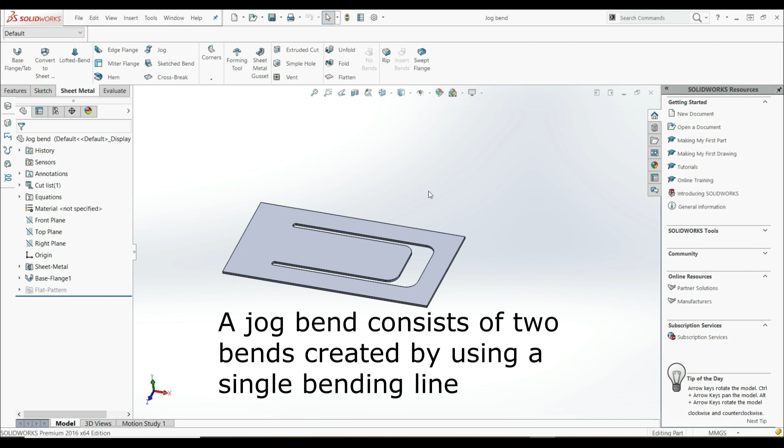In this lecture, we're going to show a new tool, and this is jog bend. A jog bend consists of two bends created by using a single bending line. The sketch of the jog bend must be a single line, and it's not mandatory to be created through the entire length of the face. So let's show how this works.

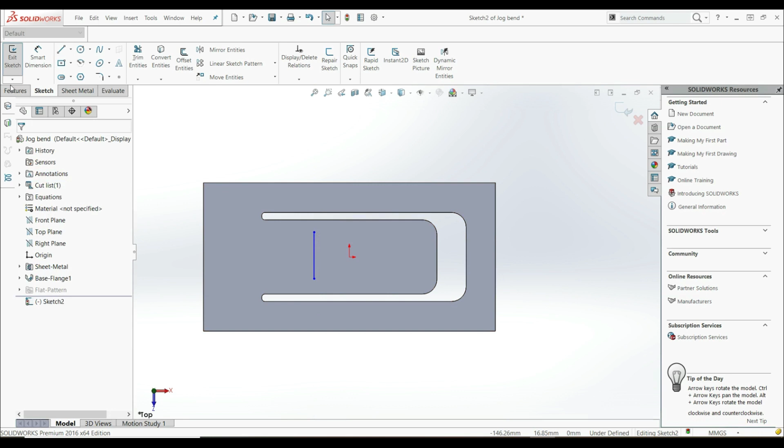So let's go to this face, let's create a new sketch. Let's select the line and let's create a line here, somewhere here. So the line doesn't have to go through the entire length of this bend. Now let's go to the sheet metal, and now we're going to select jog. Here we have to select the fixed face, so we can select the left side of this line or the right side. Let's select the left side. And now here we can see the preview.

Now here we have two bends. The first bend here and the second bend here. So the first bend is here where we have a line. And the second bend here is with some offset distance, and this offset distance is here, as you can see. So here we have a blind offset distance of 30 millimeters. We can change the direction like this, or we can go like this.

As well, here we can change the bend radius. We can uncheck use default radius, so let's go with 3 millimeters like this. Here we have also jog position, so we can go with bend center line, material inside, material outside, and bend outside as well.

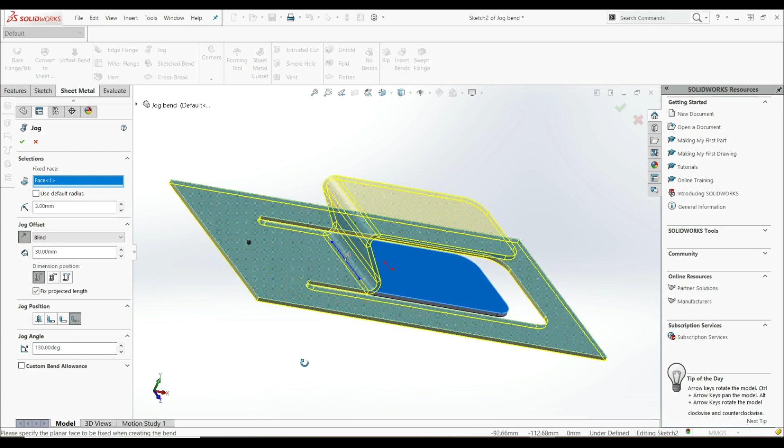As well, here we have the jog angle. We have 90 degrees by default. Let's go with 60. Now we got this result. Or we can go, for example, with 130 like this. This is also possible. But let's go with 90 degrees.

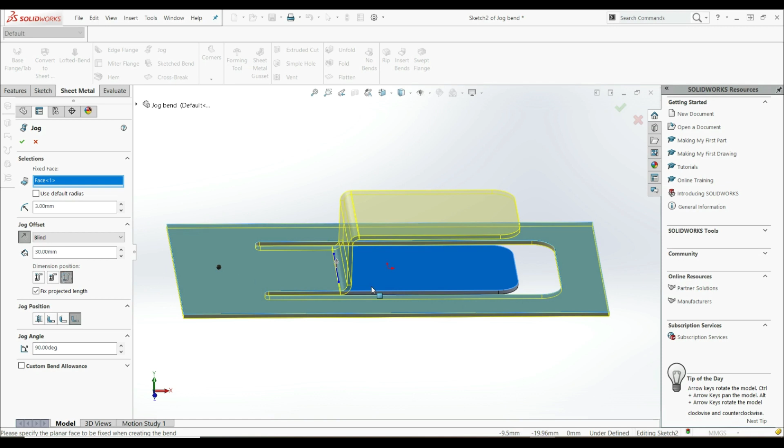Now let's explain this offset distance, because here we have dimension positions. Here we have three options. We have outside offset, we have inside offset, and we can see the difference, and here we have overall dimension, and as well we can see the changes. Now let's go to the front view like this. If we change this, we can see the changes. So let's go to the first one, outside offset.

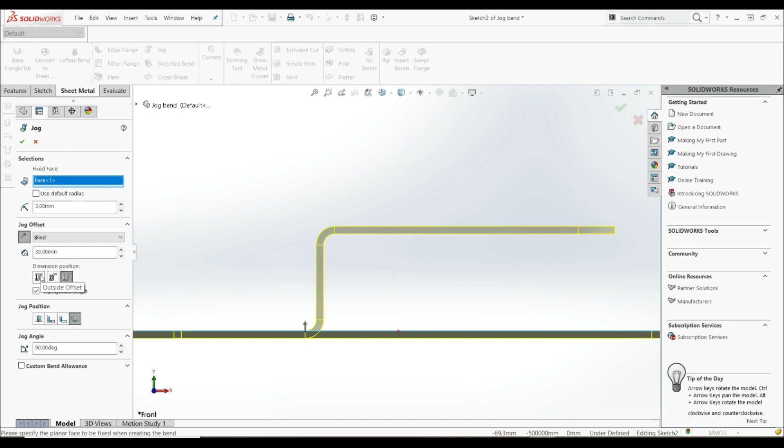So what is the outside offset? How is it measured? The outside offset is measured from this edge here to this edge here. Then we have inner offset. Inner offset is measured from this edge here to this inner edge. And the last option, overall dimension, is measured from this edge here to this edge here. So you can select any option that you want: the first one, the second one, or the third one. So let's go with outside offset, like this.

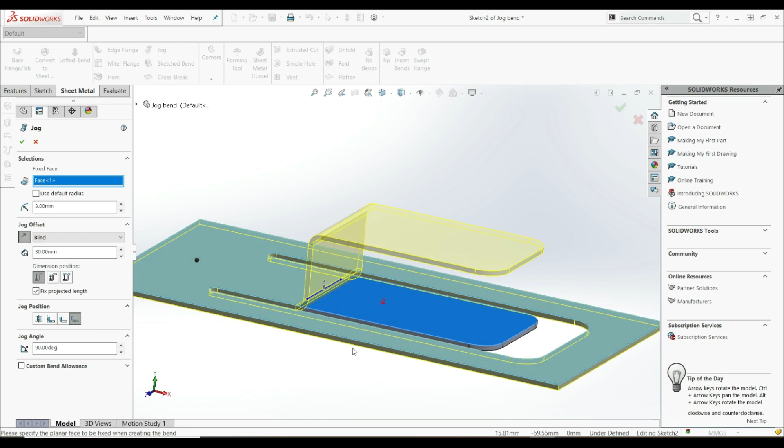Now here we have another option, and this is fix projected length. If this option is checked, this length is equal to this length here. So the result of the jog bend is equal to this one here, as you can see. The length is equal, which means that on the bends we had to add material. If we don't want to add material, if we want to only use the material that we have here, then we can uncheck it, like this. And now we can see that this material that was here is used for this bend, this one here and this one here.

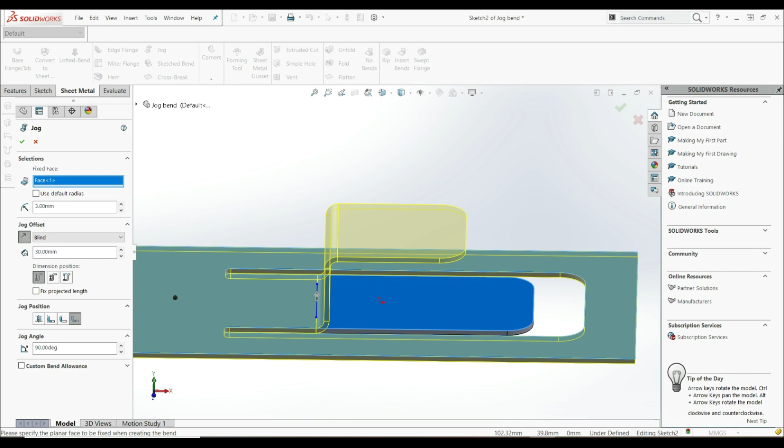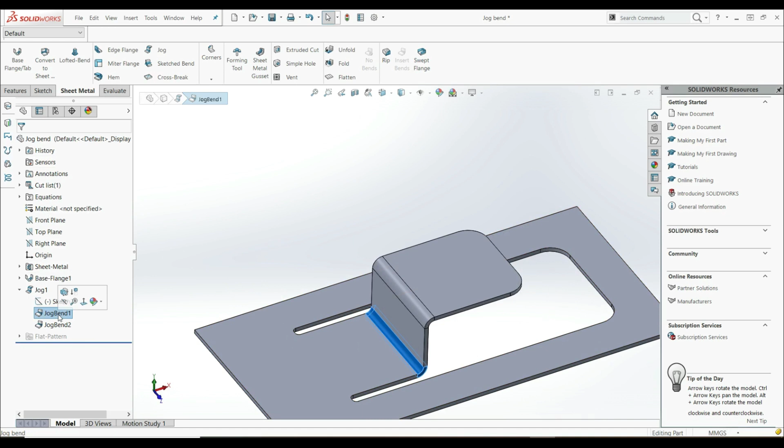So you can go with fixed projected length, or without fixed projected length. If you don't want to add extra material to the bend, then you can uncheck fixed projected length. Let's click OK. And this is the result. Now if you look at the Feature Manager Design tree, here we have jog 1. We can open this. Here is our sketch. We can edit this sketch. And here we have jog bend 1 and jog bend 2.

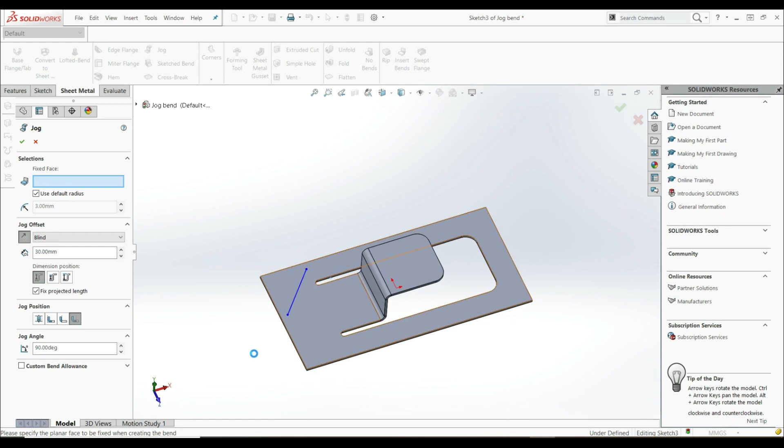Now we're going to create a new sketch. So let's go to this face. Let's go normal to. Let's select the line and create a line here, like this. Let's go to sheet metal, to jog. Let's select the fixed face, this one here. And this is our result, as you can see. And here we have Fix projected length checked. Let's click OK.

And this is how you can use the jog bend tool. So make sure that you understand what Fix projected length is. In the next lecture, we're going to show another tool, and that is the hem feature.